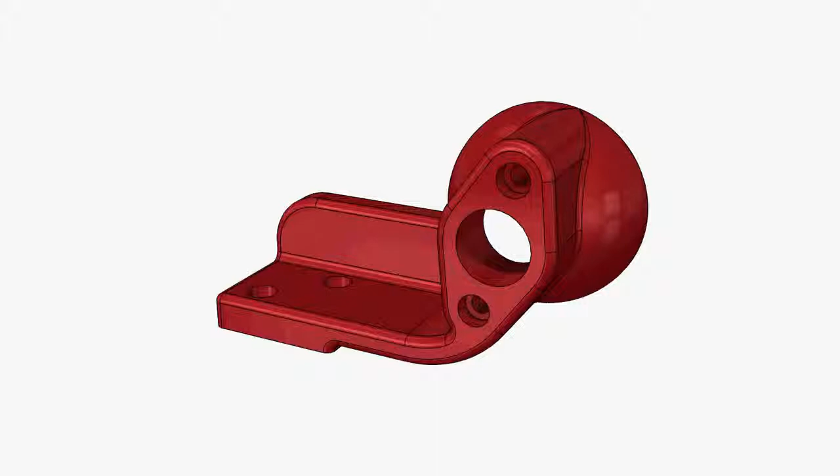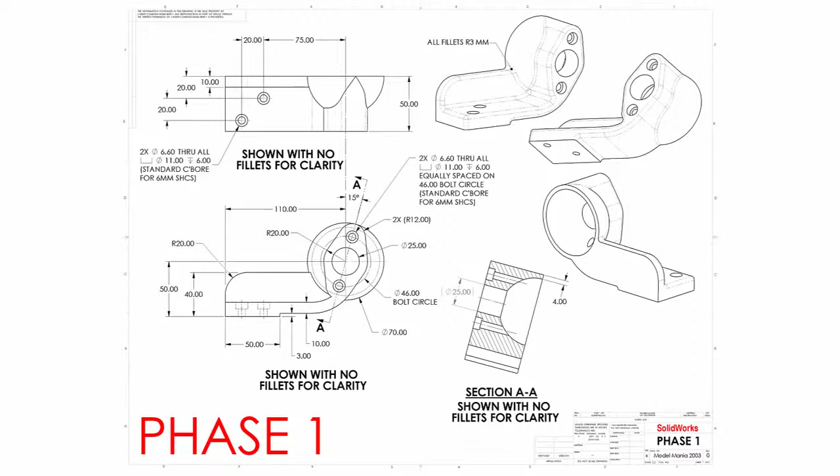In this video, we're going to take a look at creating this part from the Model Mania Design Challenge at SOLIDWORKS World 2003. If you're unfamiliar with Model Mania, it's a design challenge held every year at SOLIDWORKS World where you're given a drawing similar to this and tasked with creating the part in SOLIDWORKS both as quickly and as accurately as possible. Now, if that wasn't challenging enough, when you're done, you're given a second drawing that entails many design changes, which again you need to quickly create and make as quickly and accurately as possible.

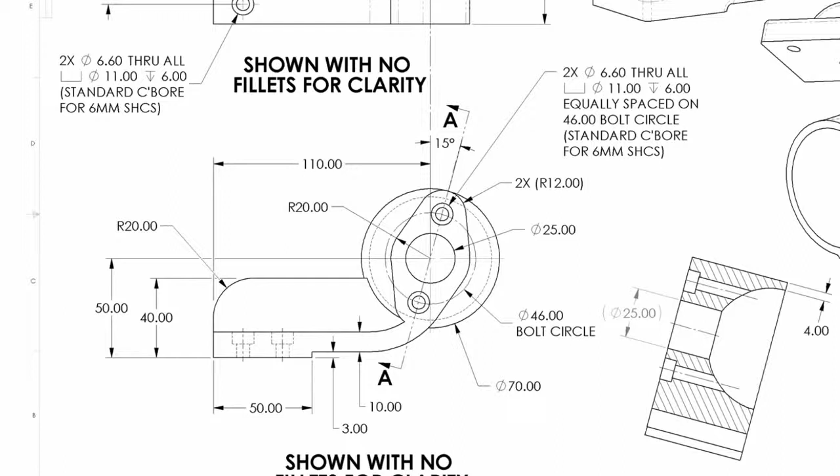The real catch is you never know what those changes are going to be. So let's go ahead and take a look at this drawing and some of the features that are going to go into this part. The first thing you'll notice is there's this combination of a dome and a flange that are both detailed out extensively in this front view. They can also be seen very clearly in the isometric view in the upper right hand corner.

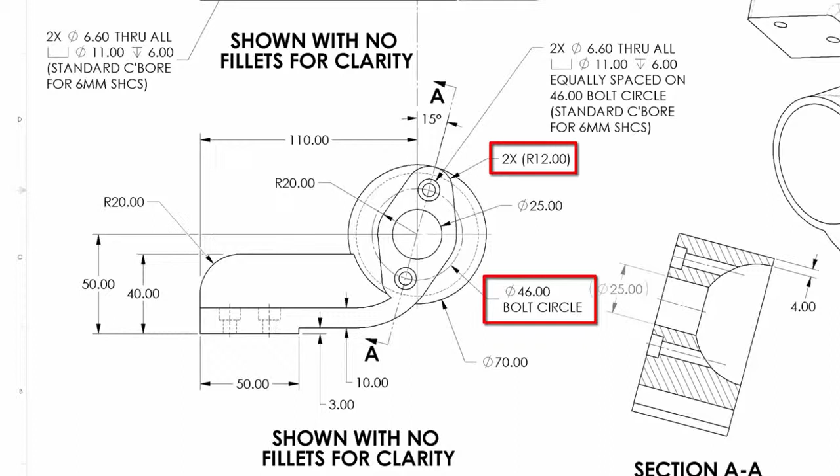Of note are a few key dimensions. Notice that the center of the circles in the arcs of the flange feature are defined by a 46mm bolt circle dimension. You'll notice that the radius here is defined in parentheses, meaning that it's a reference dimension. Specifically, that arc needs to remain tangent to the 70mm diameter circle. So that gives us some direction for the order in which we'll create these features.

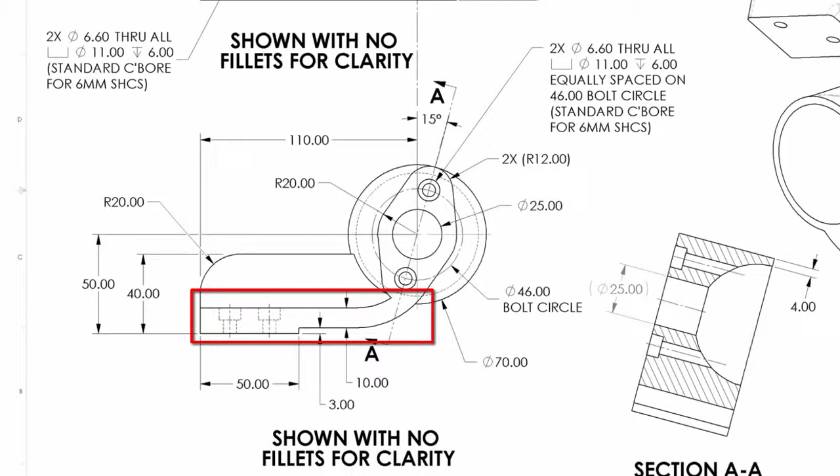The next main feature is this ledge that comes off from the bottom of this part. We'll want to make sure that we tackle this appropriately, and there's a few unique ways you can look at approaching this. We'll take a look at a few different methods. And then finally, the wall on the back side with a fillet, and then several holes and counterbores that go into the part. So let's go into SOLIDWORKS and get started by creating a new part.

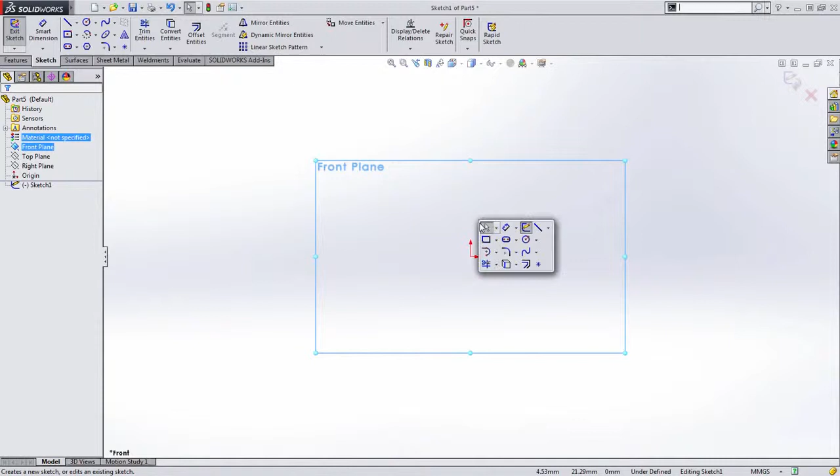Now, I mentioned that the bolt circle of that flange is defined somewhat by the dome feature itself, so that seems like a good place to start. I'm going to draw this on the front plane because I want to draw this from the orientation that we're looking at it. And I'm going to start just by drawing a circle and specifying the 70mm circle here.

Now, what I want to do is revolve this. So I'm going to go ahead and draw a line down from the middle. And to make things easier, I'm just going to trim half of that circle away. And the reason I'm going to do that is because when you do a revolve of a circle, you only ever want half of a profile.

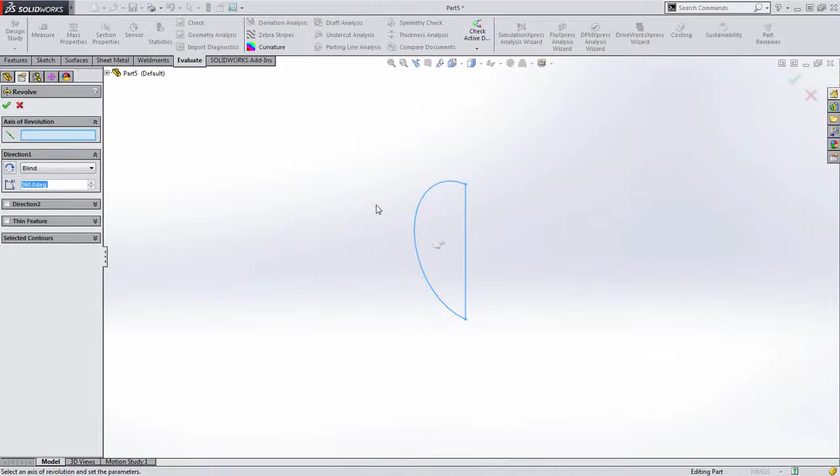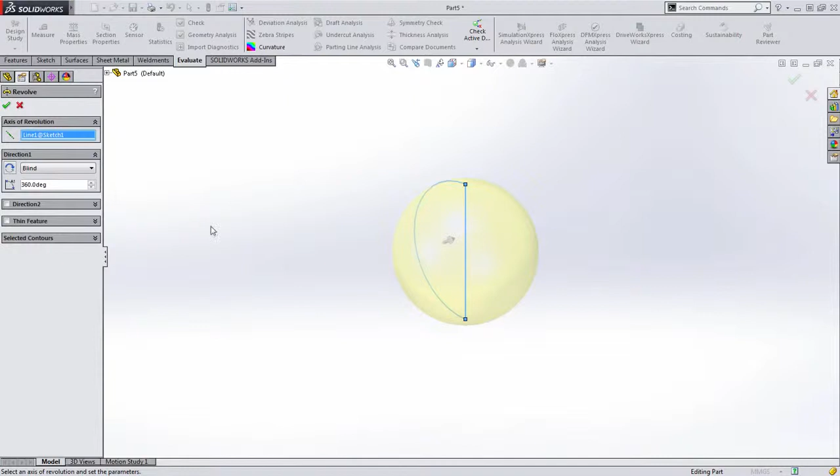Now you'll notice up in the property manager that no axis of revolution was specified, and this is because we didn't have a construction line inside of our sketch. That's okay. We're going to go ahead and select this vertical line that we just created. Now notice that it's creating a full 360-degree sphere. We don't need that, we only need 180 degrees, so let's type that in. And in this case, it's revolving away from us, and we want it to revolve towards us. So we'll flip the direction and then press OK.

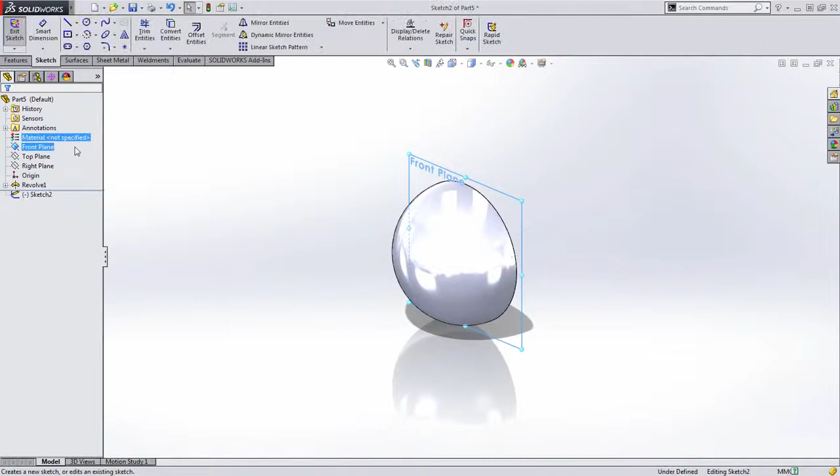So we kind of have that first feature, and this really gives us what we need to create the next feature, which is going to be this flange. Again, I'm going to draw on the front plane. I really find planes being a much better surface to draw on when possible than, say, for instance, the back face of that part. Now, this flange profile is a very common thing to create in mechanical design.

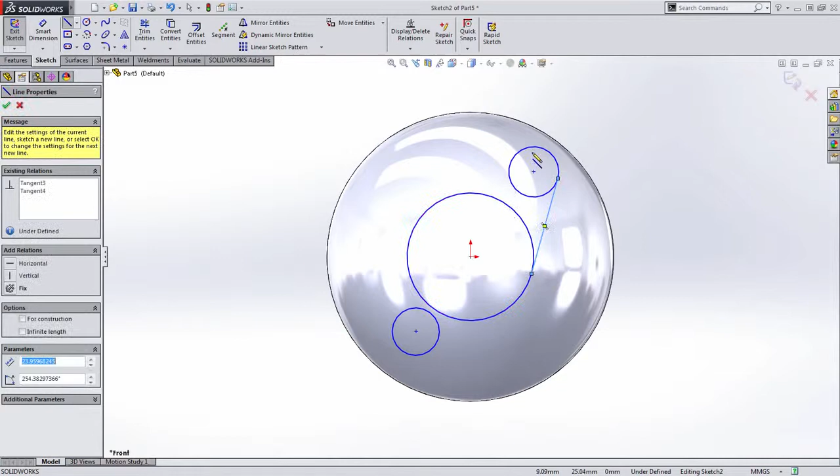It usually consists of a circle surrounded by two smaller circles and some tangent lines. Let's look at how we do this in SOLIDWORKS. The first thing I did, you notice really quickly, I went ahead and created the circles. Now what I'm going to do is draw some lines, and you'll notice that if you click and drag a line off of a circle, SOLIDWORKS maintains the tangent relationship. SOLIDWORKS also, when hovering over an arc, will try to snap to the tangency if possible. So we're going to replicate that 4 times in this case. I'm going to draw these 4 lines, snapping them to those tangent locations.

There, I missed it, so I'm just going to delete that and redraw it this time. Looks like I'm struggling pulling that straight out of there. There we go, we got it the right way this time, and we've got what we're looking for.

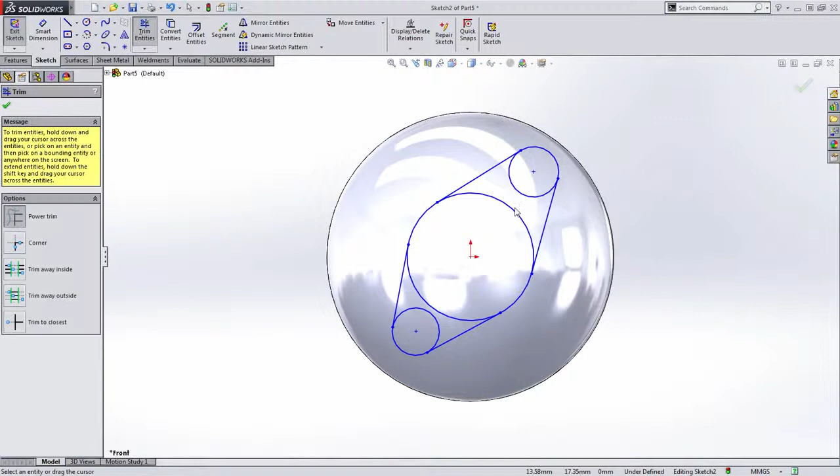Now there's a few things we can do at this point. The first one is we can trim this out. Now we don't have to. We could leave those circles and use contour selection later on. But I want to show a few things we can do here.

One of the next things to keep in mind is that these two arcs need to be the same radius. By holding the Control key and selecting those, I can choose Equal from the pop-up menu. Likewise, I know that this arc needs to be tangent to the outside arc of this sphere, so I'm going to select those two entities and choose Tangency. Now you'll notice what's happened down here.

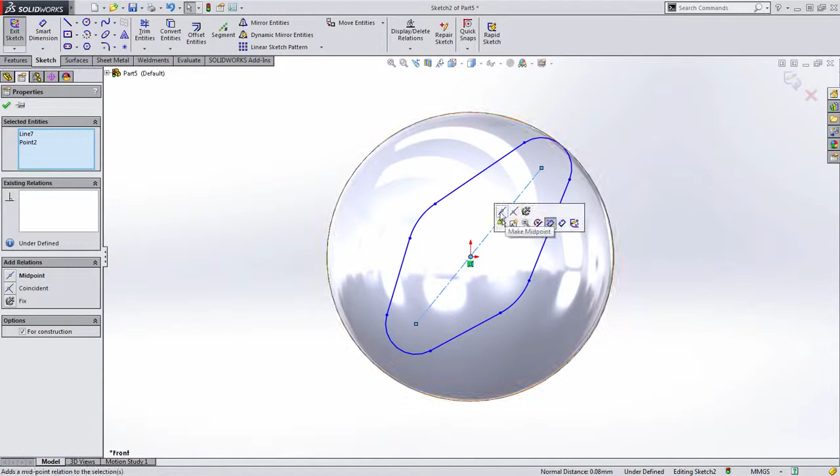Notice that this arc is still free to move. That's because they have to be the same distance off from the middle. A great way to capture this is with a center line between the two circles, then create a midpoint relationship to the center of the center circle. Now you'll notice that they always maintain the same distance.

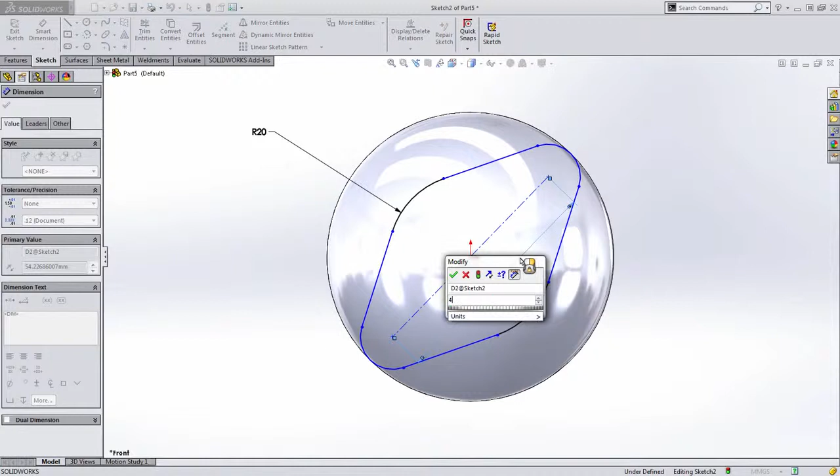And you could do this several ways. You could just dimension the length of this, for example, and in this case it's 46, and that's going to capture it. Or if you really wanted to capture this in a circle form, you could draw a circle out from the center, snap it to this point, but remember you'll probably want this to be a construction line so it's not included in the extrusion.

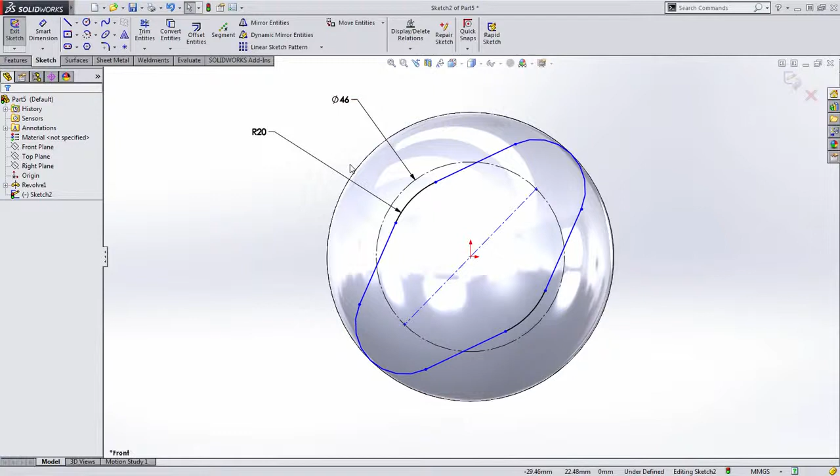Now you'll notice that when I dimension this, we're dimensioning by a diameter value as opposed to a linear value. Now the last thing we need to capture here is this angle. You'll notice that it's free to move. Now there's a couple ways you could do this.

You could draw a center line vertically straight up and then go ahead and add a 15 degree angle there. But another way you can do this without needing to create that construction geometry is to dimension to the system planes. Notice that my right plane happens to fall vertically when we look normal to this sketch. I can select the right plane and that construction line and create the same dimension we did before. That's a nice way when you want to avoid excess geometry.

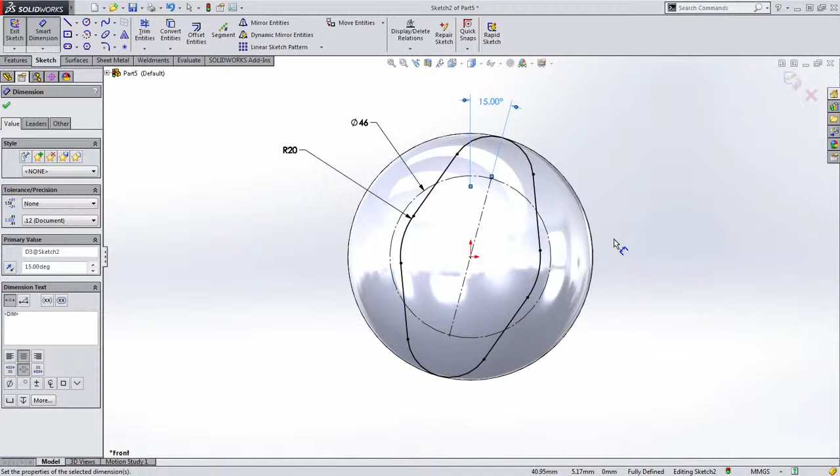All that's left in this case is to go ahead and extrude this, the thickness of the part, which is 50 millimeters in this case. Now let's go back to this drawing.

This ledge at the bottom can be created multiple different ways. It could be done with thin features, multiple profiles, etc. We're going to take a look at a few different ways you could do this. One of the first ways is using multi-body. We can start with that ledge on the outside working with known dimensions.

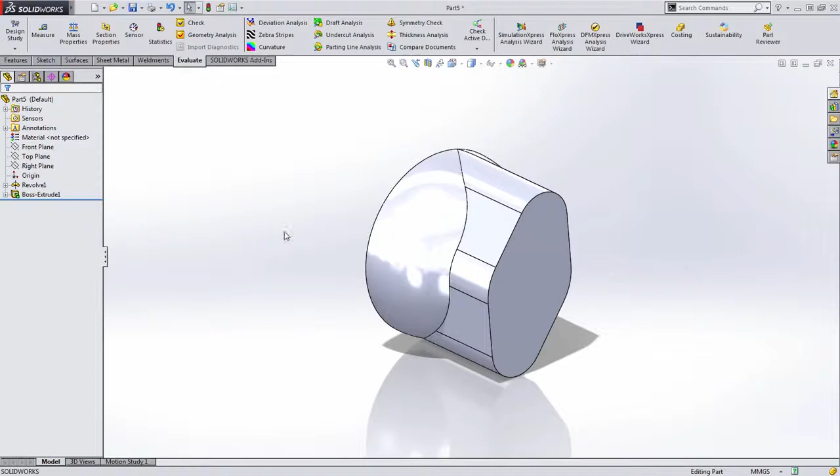I'm going to go ahead and start with a sketch on my front plane, and we're just going to draw a rectangle out here in space. We want the 3 millimeter offset off from the bottom and the 50 millimeter width. Now you'll notice I know the dimension from the center to the bottom is 50 millimeters.

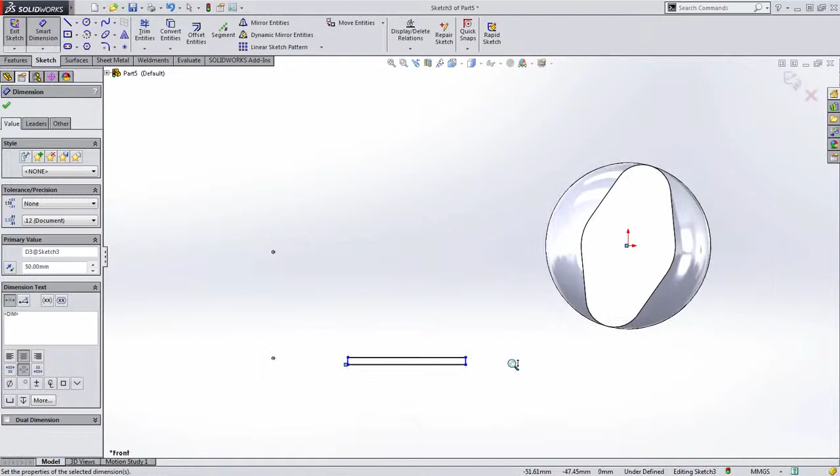Conveniently, my origin is located at the center of that circle. That wasn't by coincidence, that's because we intentionally drew everything from the center. Now again, I'm going to dimension from the center, and this time we're going to dimension to the outside here, and we're given 110 millimeters.

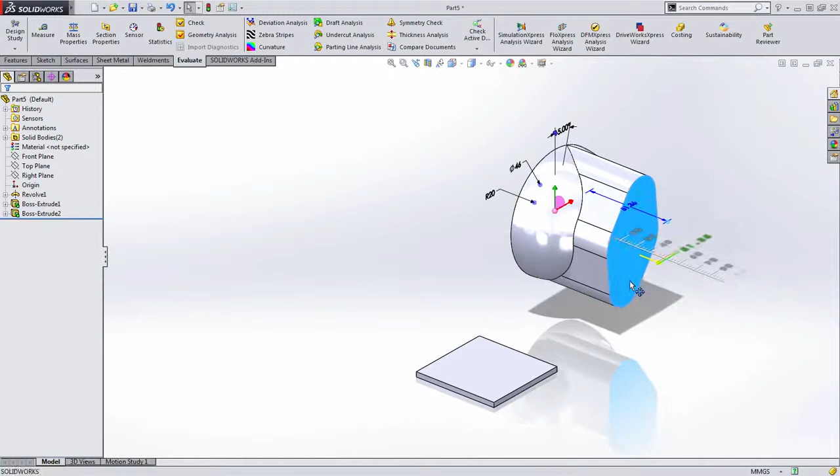Now you'll notice what I'm going to do here. I have a sketch floating out in space. We can go ahead and take this and choose to extrude, and I'm going to just go up to this face. Now the reason I use up to face is so that if this thickness ever changes, notice that that platform always maintains that same distance. Let's go ahead and type in 50 to restore that.

Now how do we tie these together? This is where the thin feature really comes in. What we're going to do is draw a line straight out horizontal, and I want to convert it to a tangent arc. An easy way to do this in SOLIDWORKS is to move your cursor back to the line and come straight out.

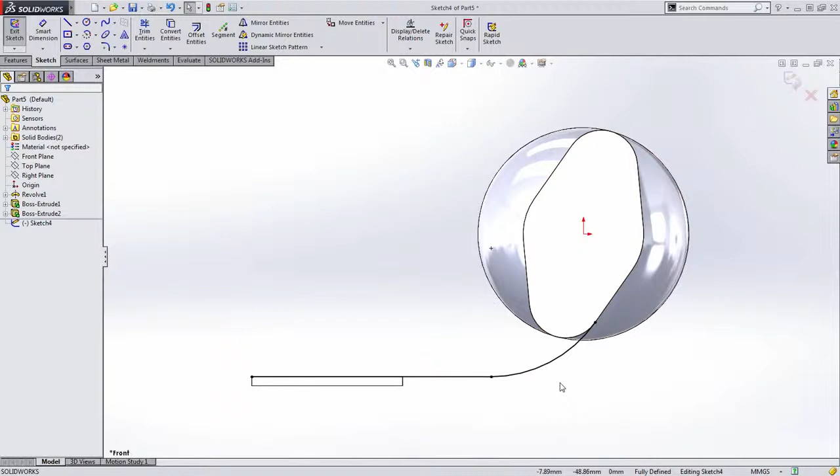In this case, I'm looking for that vertex there. I'm going to drop this here for right now and go straight back to it. I'm going to manually select these two and choose coincident, then grab that edge and that arc and make those tangent. That might have been a little confusing to see on the drawing, and I apologize for that.

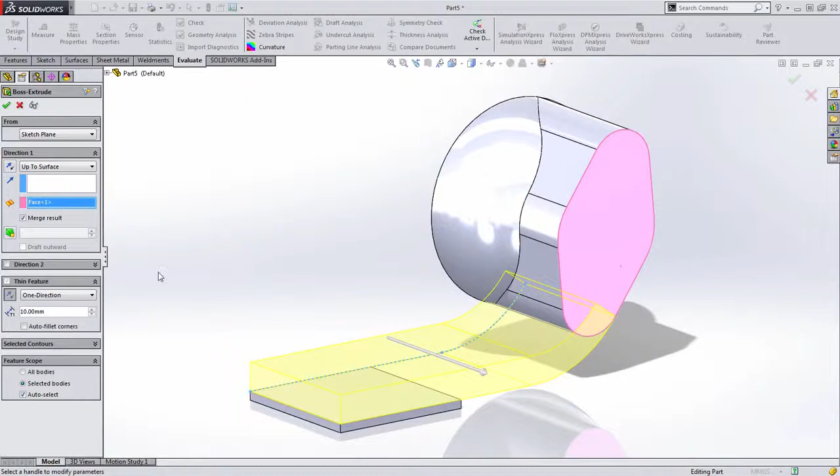So we've got that done. Let's go ahead and now use this. Like before, we're going to do an up to surface so we always maintain that relationship. Notice here, SOLIDWORKS has automatically recognized we want this to be a thin feature. All we have to do is specify that width of 10 millimeters, set it in the right direction, and press OK. So there we've done that with a combination of a multi-body and a thin feature.

Another way we could have done that—let's go ahead and delete both of these. Let's go back to this sketch right here. I'm going to keep that dimension we're working with in this case, and notice what I'm going to do: I'm going to actually draw over top of this, and you could do this a variety of ways. We could have done this all in one sketch.

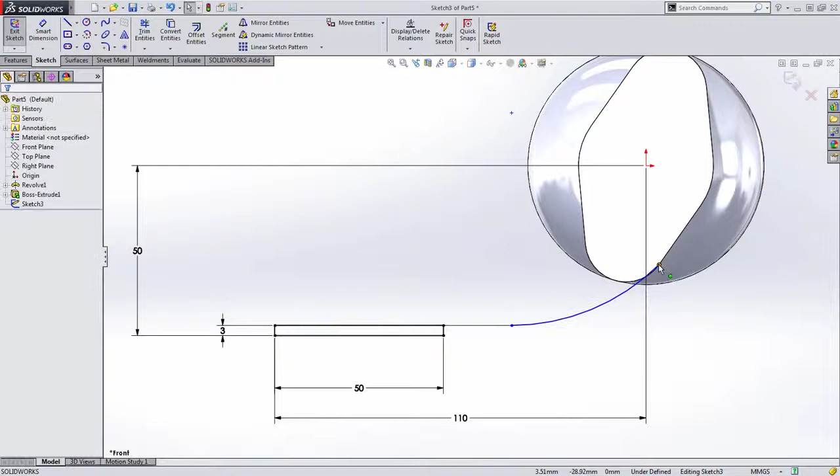I'm going to go ahead and make this tangent here and here, and then in this case we're going to offset this 10 millimeters. We'll reverse the direction, close that, and then cap the ends. Now, one of the reasons I don't like using this is there's a lot of extra geometry. Notice the thin feature was a little bit easier. Then we can go ahead and get rid of all that extra geometry in there.

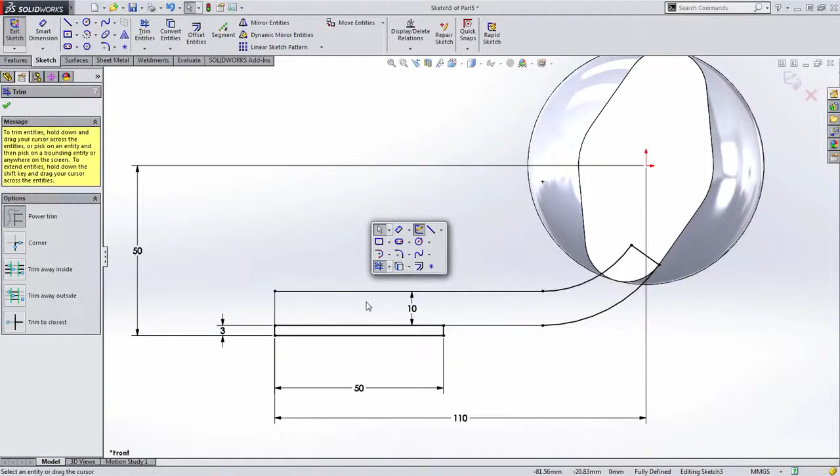And in fact, let's change the way this is done a little bit. Let's extend that. Let's do trim to closest, and we'll choose to extend. There we go. And then we could have done this all as one profile as well.

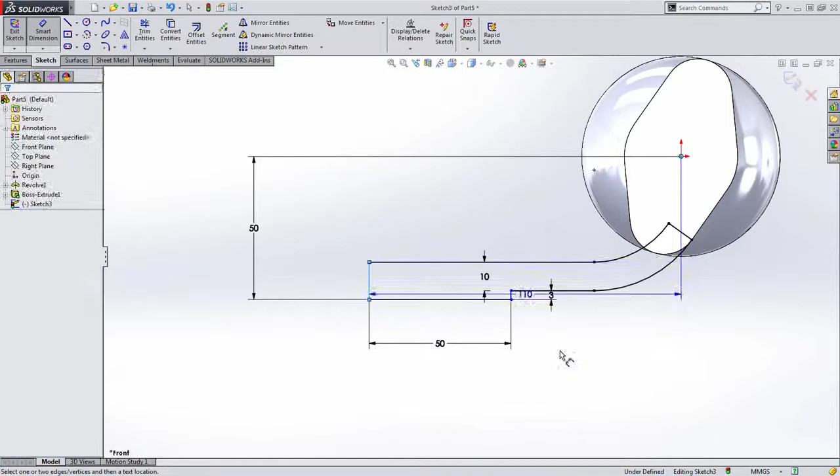So many different ways you could have tackled this same challenge. I just showed you several different ways you could have done it. We could have actually kept that feature the way it was with the extrude up to next, but I wanted to show you a variety of different ways you could have handled it. There you go. Let's go and look at creating that back wall now.

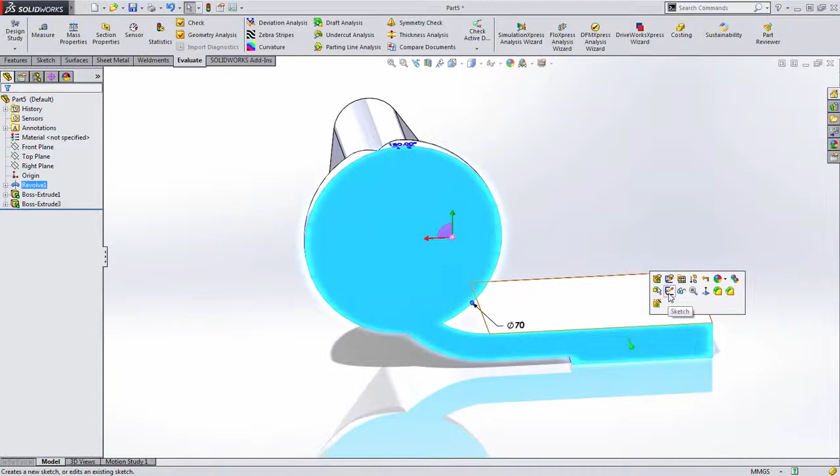Again, I'm going to draw this on this face. Actually, I'd be cheating if I didn't show you some of the advantages of drawing on a face. I'm going to reuse some of this geometry, so I'll use convert entities. Notice what that's done—it's copied that geometry onto this profile for us here.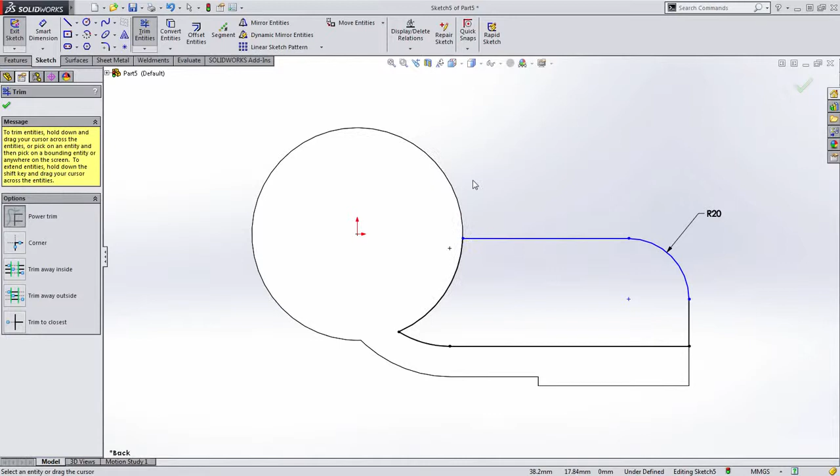And then all we have to do at this point is draw basically the rest of that rectangle. Let's go ahead and add a fillet in this case of 20 millimeters and trim the rest of this geometry away using power trim. And a height is given to us here, 40 millimeters off from the bottom.

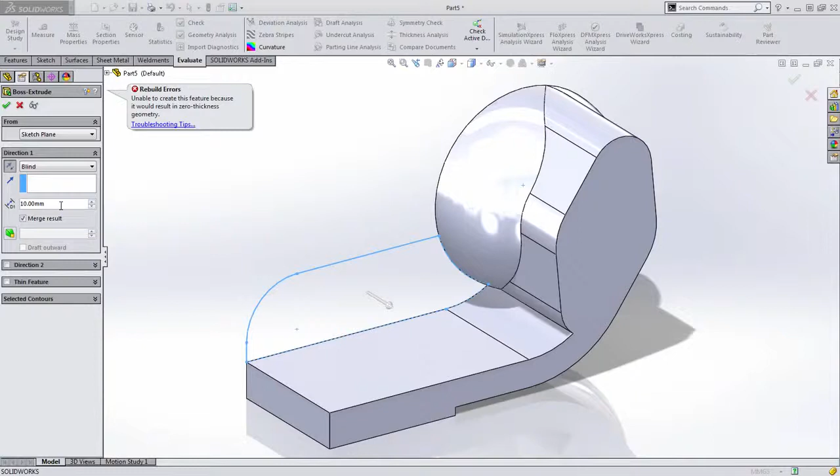So there we go. All that's left for us to do is choose to extrude this, making sure it's going in the right direction and the right thickness. Now look what's happened—we have a bit of a problem here. It actually can't create the extrusion for us, and the reason is something called zero thickness geometry. That's because when we extrude this up, we're going to create this tiny little wedge down here.

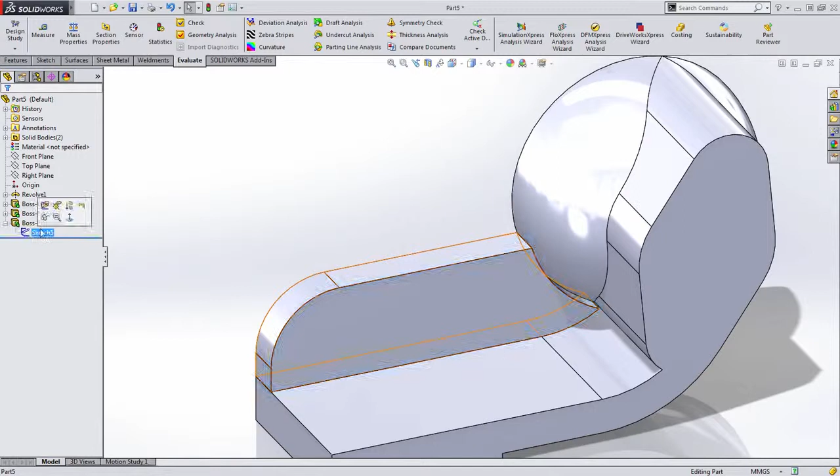If I uncheck merge results, it's easy to show what's happening. You get to a spot right here where there's actually virtually no material. So how do we solve this in this case? Well, one of the ways we can do this is by changing the way we create this sketch.

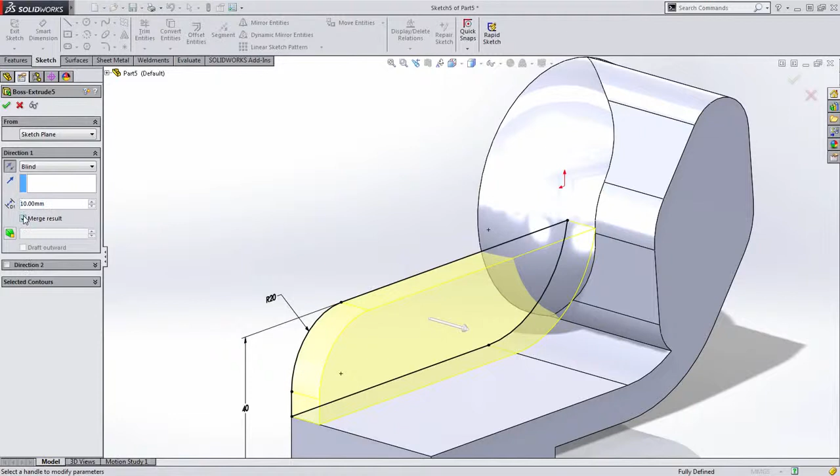I'm going to continue this geometry up, and create a corner fillet between those two entities. Now when I close this, you can see it brings them together. One thing we want to do is change that from not merging to merging, and that'll join all that material together in that location. So a couple things to watch out for there.

So we've got that done. What do we need to do next? It looks like we need to add some holes and some counterbores. Let's go ahead and do that now.

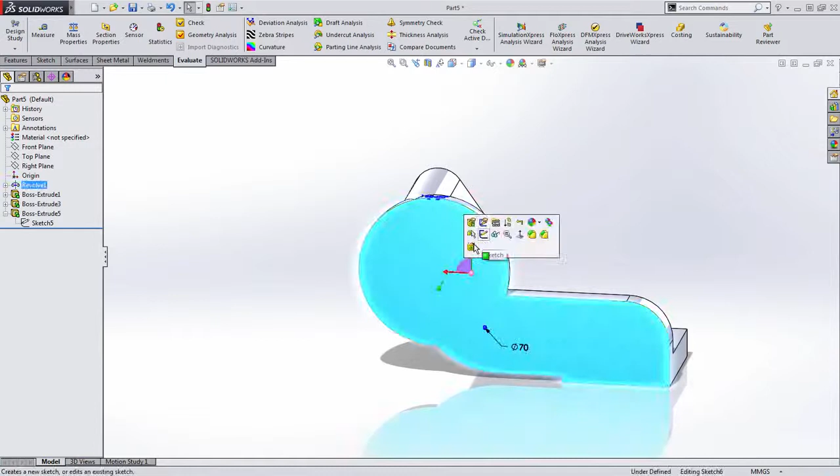We also need to hollow this out on the back side, so let's draw a sketch here. We'll do this similar to how we did it before. We could use an offset, but I'm going to dimension the circle off from that outside edge instead, because an offset wouldn't give us a full circle and we might not get exactly what we're looking for. We'll create this identically to before by trimming that outside.

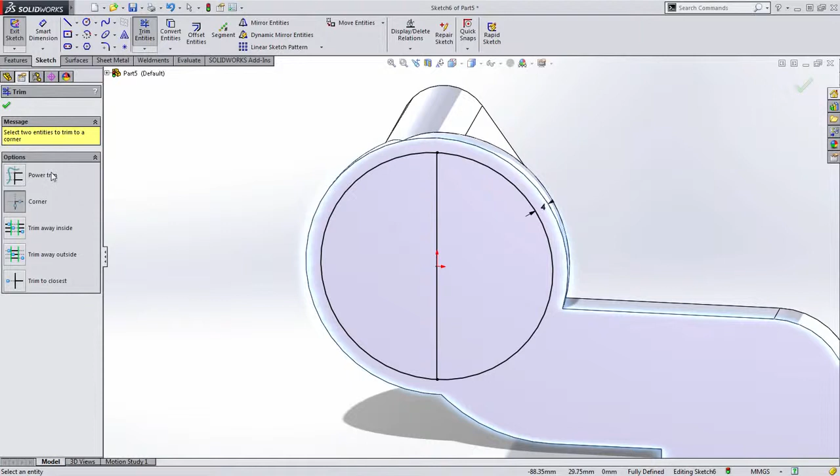This time we're going to choose cut instead of extrude, and again choose that center line as the axis of revolution. Notice this time we don't need to limit the angle to 180 degrees, because a full 360 cut is going to give us exactly what we're looking for.

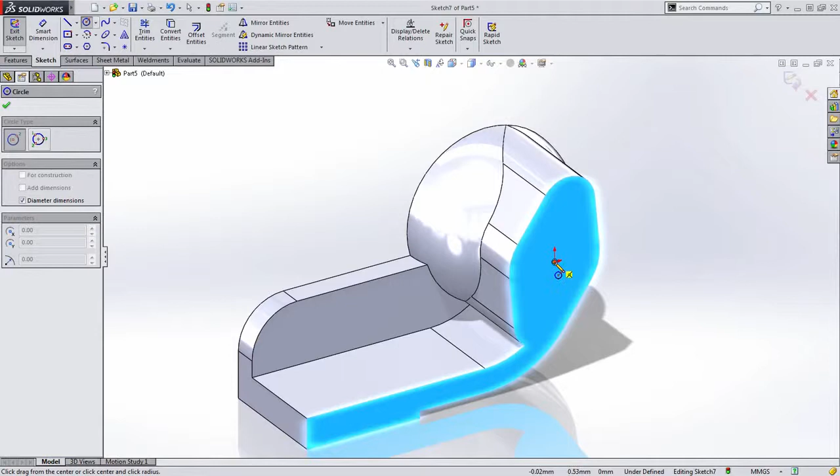There's also a cut that comes off from this top face right here, and that's a 25 millimeter diameter. Let's enter that value in - I typed in the wrong value. Let's go ahead and choose cut, and from the right click menu I'll choose through all, then right click to confirm.

The last thing we have is a series of counterbores and some fillets we'll have to get to. I'm going to create these counterbores right now, and then go back and show you how order of operations can affect this.

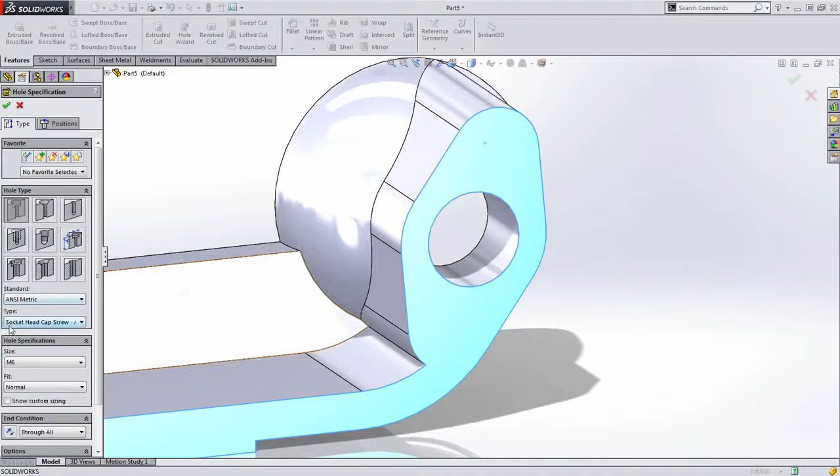Let's go on this face. I'm going to create a counterbore, and you'll notice it gives you all the dimensions, but at the bottom it says standard counterbore for a 6 millimeter socket head cap screw. So we've got all that information already specified. Notice the end condition is through all.

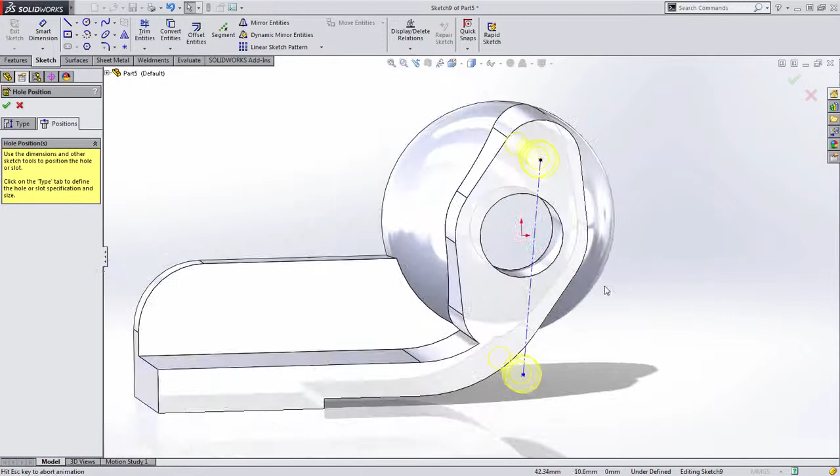For positions, we're going to snap this to the middle, and you'll notice I have a little bit of trouble grabbing that edge. Here's an example of where you could use the construction line trick we showed earlier to tie two things together. Now I can snap this to the origin, and when I make those midpoints, that's always going to fall the same distance away. Let's go ahead and confirm that.

Then we have two counterbores on this top face right here, so let's add those as well. They're the same size, so we're just going to create these and put their positions in place.

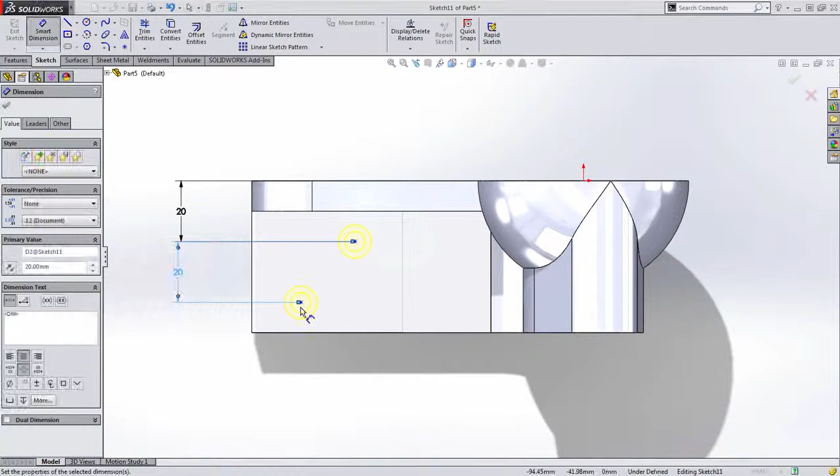Now I'm going to dimension this 20 millimeters off from the back edge here - they're 20 millimeters apart both vertically and horizontally, so we'll dimension from point to point. And finally there's a distance off from the center of 75. Again, I'm going to use the origin to dimension to, since it's easy to pick and it never moves or changes. So let's go ahead and press OK.

We pretty much have everything we have in the orthogonal views, but notice in the isometrics there's lots of fillets that go on this part. So let's go about creating those now.

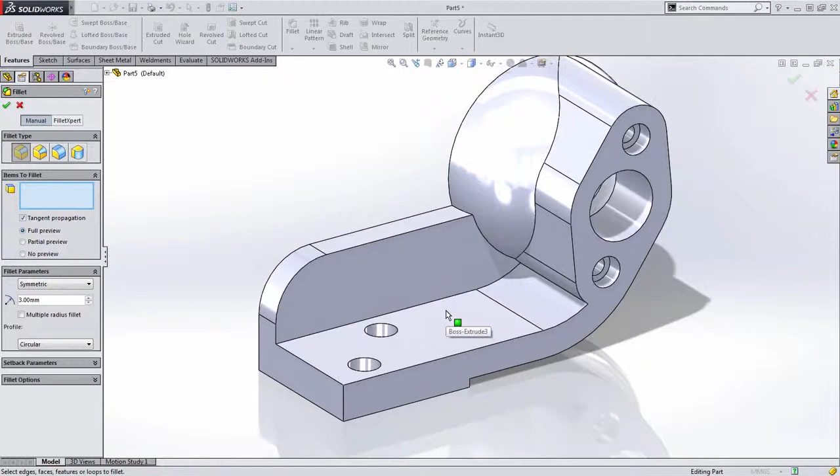These are 3mm fillets, so we'll enter our radius. If you've watched the previous videos, you probably realize I really like grabbing faces, and one reason is faces capture a lot more geometry in one pick than grabbing individual edges. The problem with grabbing faces is sometimes you can't create them.

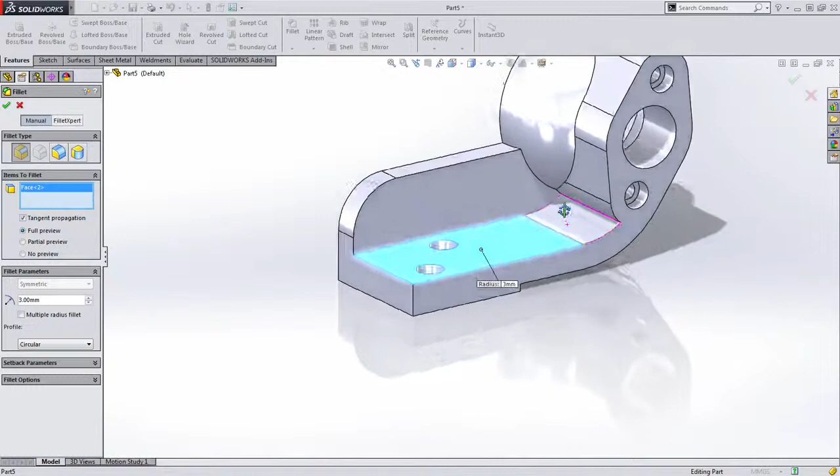The reason is it's trying to create a fillet on this edge right here. If you remember a moment ago, I said one of the things we could do is change the order of operations.

Notice the difference if I, before this fillet, now try to create that 3mm fillet. SOLIDWORKS has no problems creating that.

Though in this case, you'll still need to grab that corner. We do want to grab these edges right here, and we'll want to grab these right here.

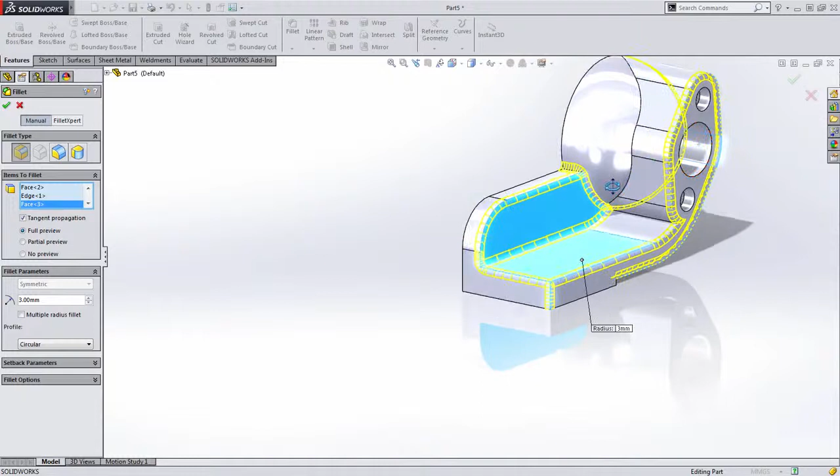Now you're probably wondering why this face specifically. Well, if I grab this face, it's going to try to put a fillet on that outside edge, which it doesn't like because of the way this fillet blends in right there. We also have a fillet on this inside edge right here.

I'm going to go ahead and grab that face right there. And it looks like we have them all except for that one right there.

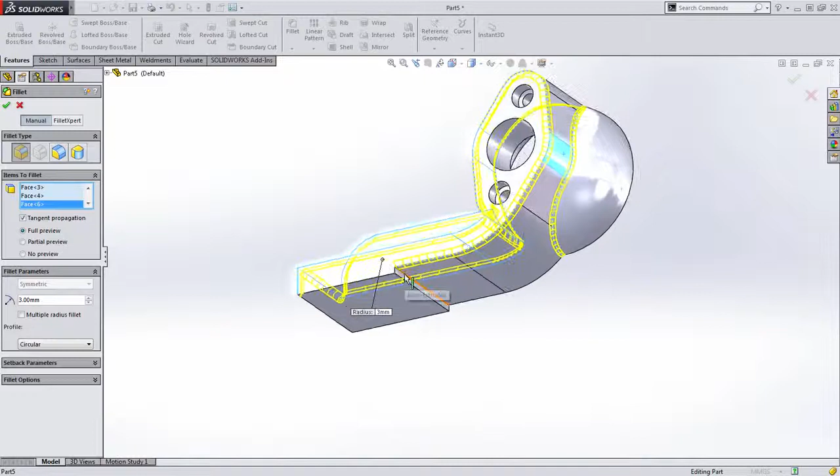Now, what if we wanted to keep that order the same? For example, I create my counter bore and I want the fillet to come at the end. Notice it's going to give me a warning here. All we need to do is choose not to create the fillet on that face.

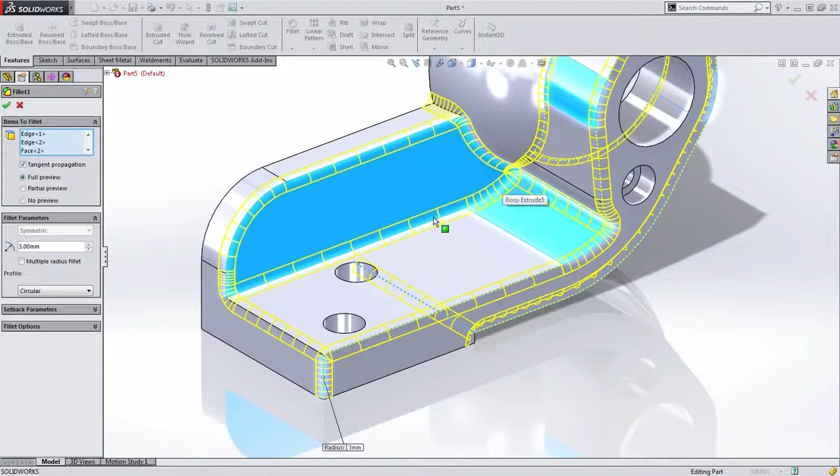And notice because I chose this face, the tangent propagation option allows the fillets to continue the way we had them before. So just a few tricks there when working with fillets. Keep in mind the order you create them can have an impact on how they look.

So there we go, we've got our whole part done. Everything looks great. So what happens next? We're given phase 2 of the drawing where we need to make some changes.

If we look at these changes, there's some very significant ones here. The first thing you'll notice is that this rib along the back has been repositioned from the back face to the front face. That's a huge change on this part.

Additionally, the location of these holes has been affected. We've changed the distance from the center, but also that back edge isn't there anymore, and we've changed the dimension to 10mm. Going to the front view, you can see that there's now this big tangency between that back face and that boss as well.

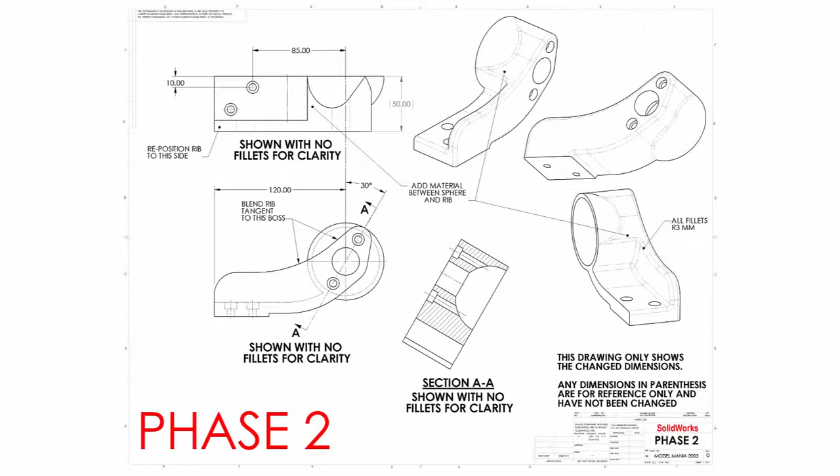And then finally, there's this extra material that's been added. So we've got all sorts of changes. This is a really tricky part. So let's dive in and take a look at how we'll approach this.

One of the things I like to do in a part like this is roll back and take a look at this feature by feature. The dome hasn't changed, none of the dimensions have been affected. But if we take a look at the next feature, we do see several changes in this case.

I'm going to go to a front view, and the angle of this has changed to 30 degrees. So let's go ahead, that's pretty simple. We type in the new angle, everything updates perfectly.

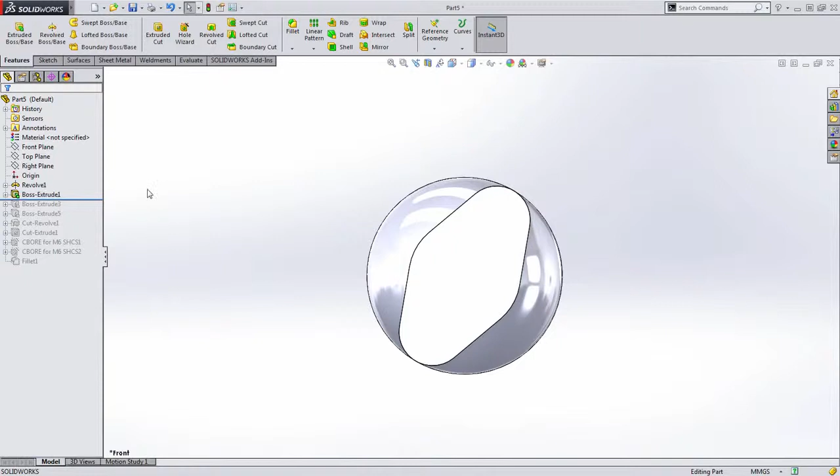Then when we move along, this ledge that we've created, well, conveniently, nothing about that ledge has changed, so we're not affected by that.

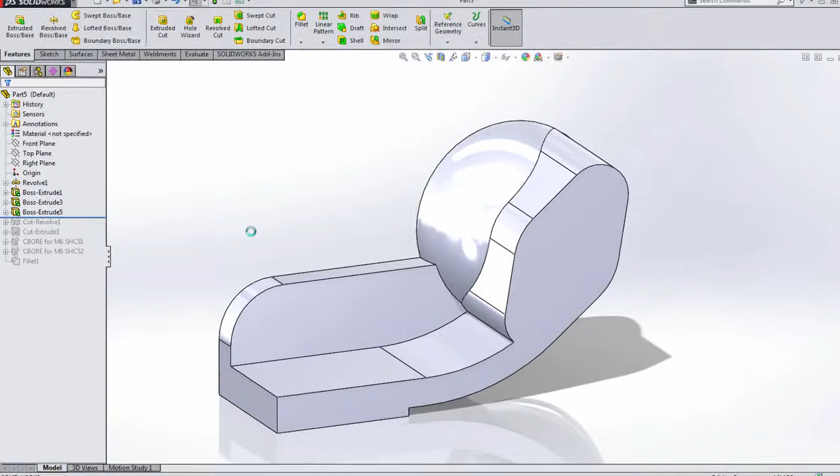Now, here's where things get interesting. This face needs to not only move from the back of the part to the front, it also has to have a rather large radius added to it. So let's take a look at how we'll tackle this.

I'm going to do this by changing the face in which this was drawn on. And to do this, we have to access the sketch, and you'll notice you have the ability to edit the sketch plane.

Now, remember when I created that, I chose that face and I said it was a bit of cheating? Well, I knew that this was going to be created on this face. Now, when I do that, it makes the change pretty simple.

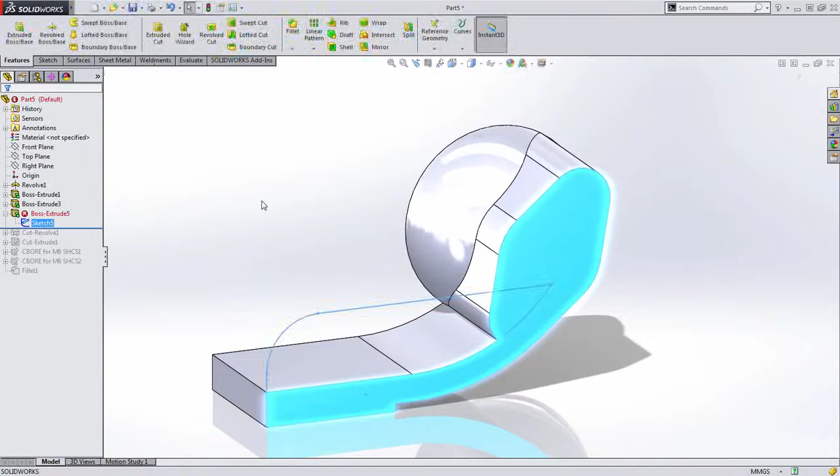It does still fail in this case, and the reason is we're going to end up with that zero thickness geometry issue right there. But if we change the direction to the inside, notice it solves no problem.

But what about that fillet that we wanted to create right there? The best way to capture this is in this same sketch right here.

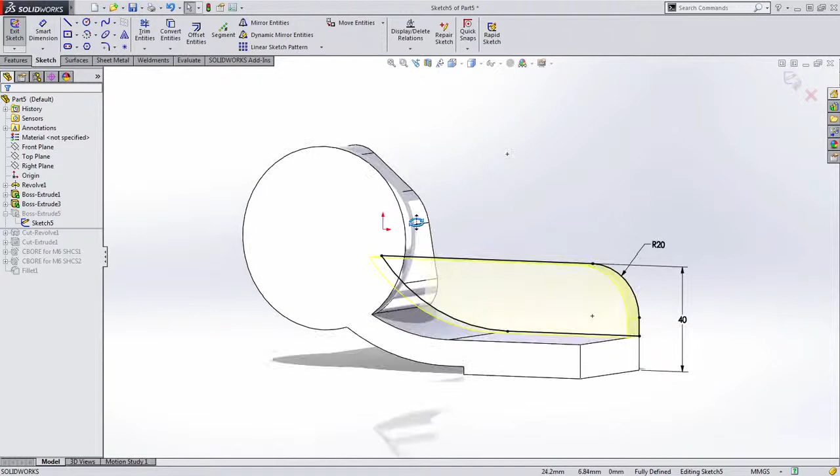And what we're going to go ahead and do, let's go over to this view. Let's go normal to and then normal to again. There we go. We want to create a tangent arc off from here down to here.

So I'm going to go about doing this by creating a 3-point arc. This is going to require what I would call a little bit of manual work, so we get the tangency.

We need some more of this geometry. You'll notice what I'm going to do—actually, I'm going to delete that. I'm going to show you another way we could have done that.

I need this arc, and this arc, and by convert entities we're going to use those. Now when I create a tangent arc, you'll notice I can come straight off of there, so it's a little less manual than what it would have been. But down here, we still need to make these two tangent to one another.

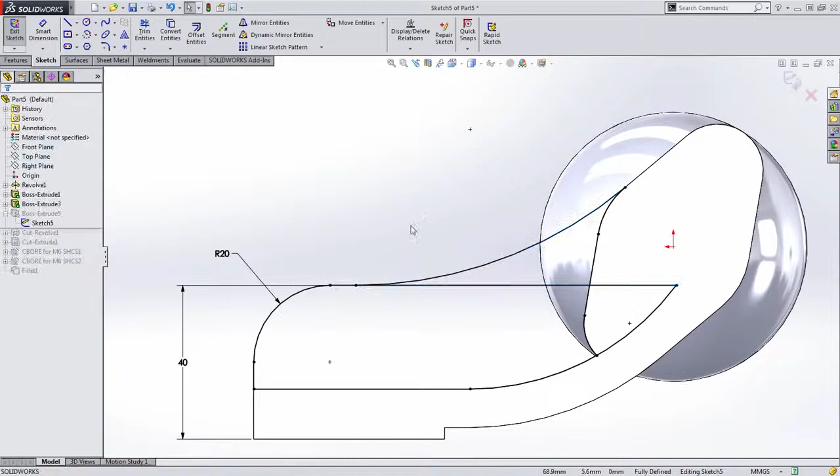Now we have a mess here that we really want to clean up. So I'm going to access the trim tool, and I'm going to start by cleaning up some of this geometry to close that profile. And just like that, you can see if I close the sketch, we've now got that feature.

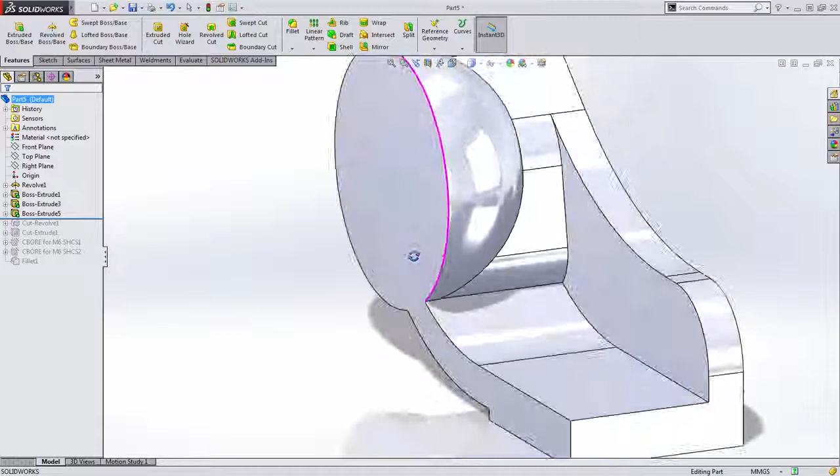Now, this doesn't mean that everything else that happens after this is going to be convenient. Let's take a look at what happens. We're going to go ahead, here's our cut. Here's our cut extrude through, no problems.

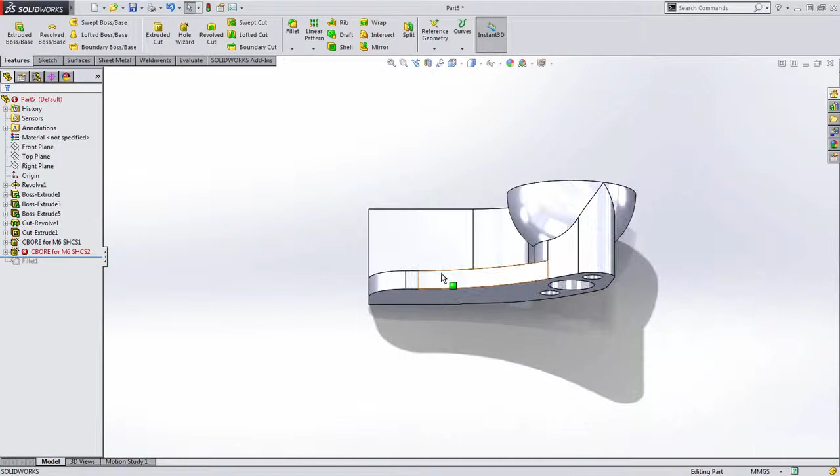Here's our counter bore. Now, if you had created that counter bore to that arc, you may have had problems with that updating. What about these counter bores here? Notice they don't even appear. That's because if you remember, we dimensioned them to that back face of that ledge there.

So let's go ahead and look at that sketch, and notice what it's doing—it's dimensioning it to that face. But these dimensions have changed. Instead, they're dimensioned off from this back edge by 10 millimeters now, and this dimension here is changed to 85.

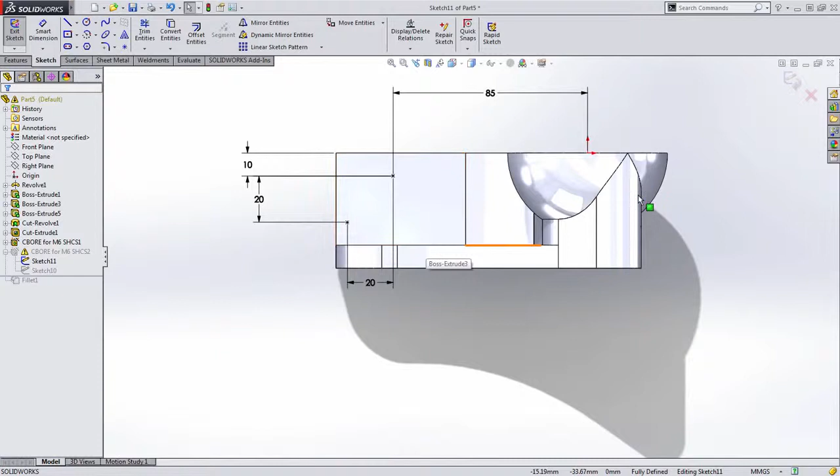I noticed that's a little close. There was actually another change that took place that I skipped over—we missed a dimension. We need to go back here. This dimension was 120, there you go. Now you can see that counter bore made it very obvious what we had missed there.

And we're going to save the fillets for last. There's a big piece that's missing here, and that's all this material that needs to get added to the inside right here. So how are we going to go about doing this?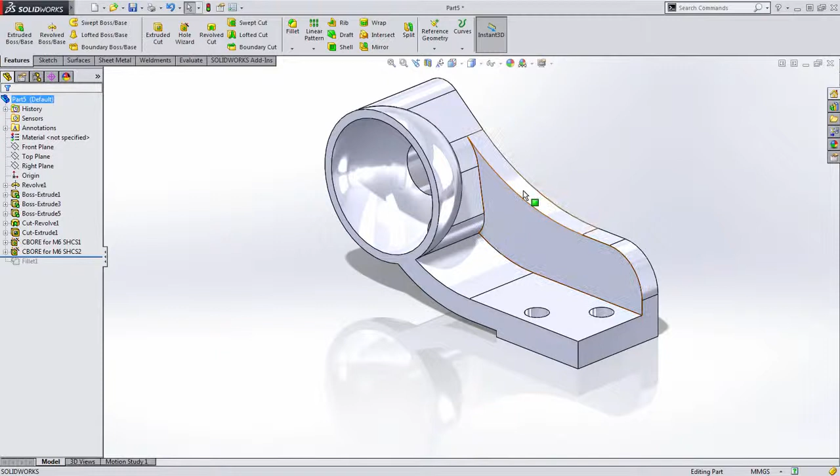This is a great place to use convert entities and up to next extrusions. What I'm going to do is start a sketch on this inside face, and choose to just copy all that geometry. Then we know if I look straight at this, it needs to be this intersection area here.

So here I'm going to use convert entities again, and grab this outside arc and choose to copy that as well. Now you could trim all this up, but keep in mind, selected contours allow you to just select a region that you want to work with.

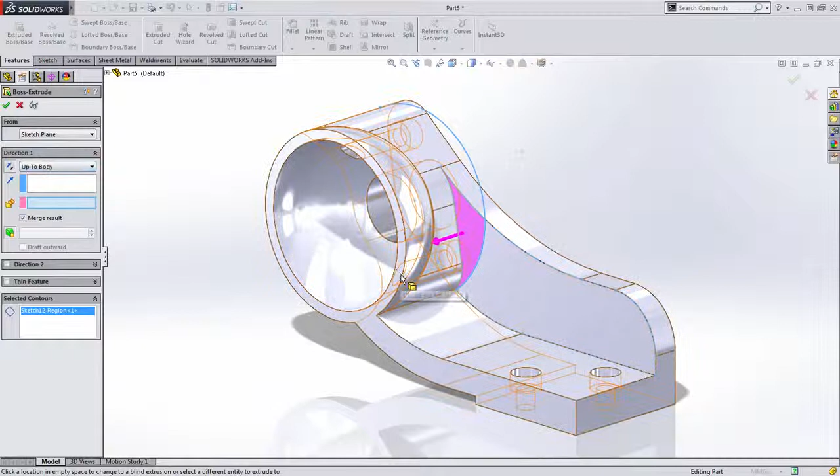Then all we need to do is choose—normally up to next would be an option here. Sometimes when it's not, you'll want to use up to body and just select the body of the part, and notice how it fills that in for us.

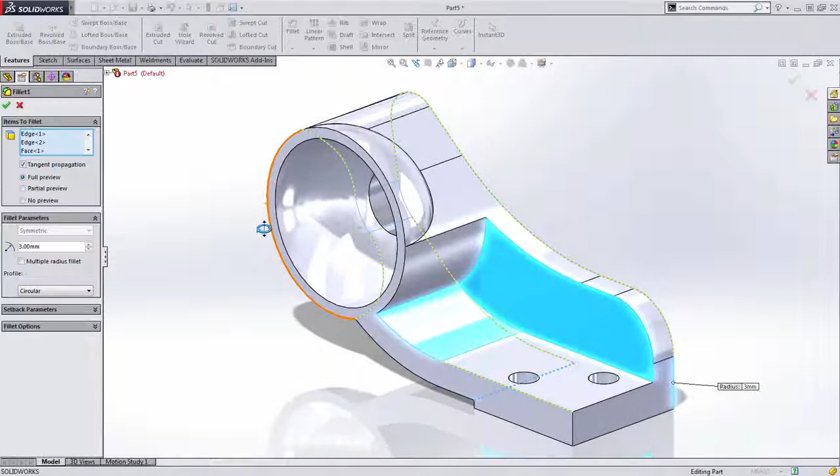Now, because of that big change right there, that one more than any, we're potentially going to have problems with our fillets right here. Some of the faces that we had selected previously no longer exist, and notice it says there's a face missing. That's okay—we'll go ahead and delete that from our selection, but it's still not solving. Why is that? Well, now we're running into a case where sometimes you need to create fillets in a slightly different order.

So notice what I've done there—I'm going to select these in a slightly different order to make sure I get what I need in this case. And there we go, it looks like it's cleaned that up. We've gotten everything we need and everything else is preserved on the outside.

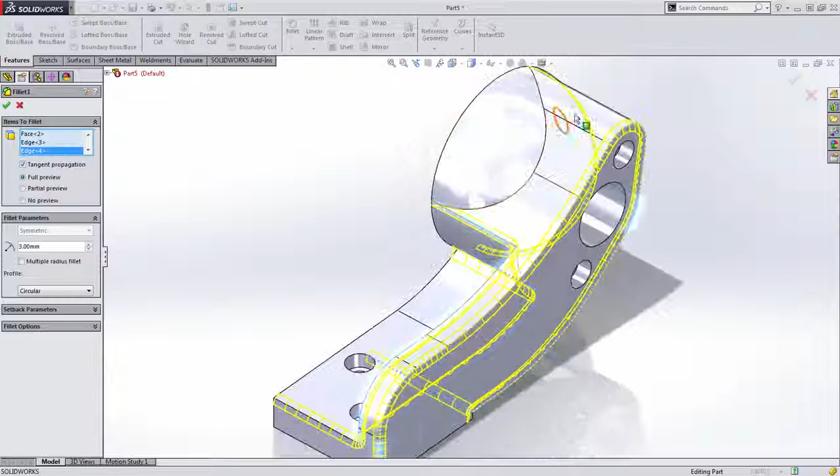All we'll have to do is at the end create this last fillet as a separate feature here. Now you could have done this in a variety of different orders—that's just one way you could have gone about that.

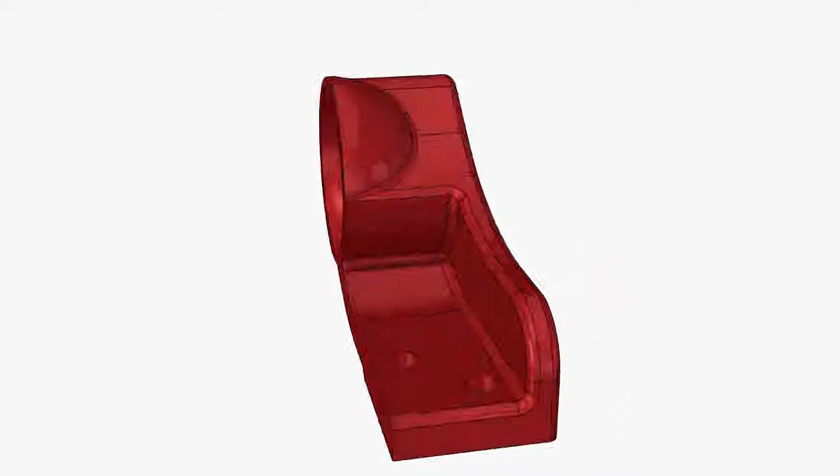So there you go, the Model Mania Design Challenge from SOLIDWORKS World 2003. This one had a lot of changes to the second phase, but hopefully you can see how SOLIDWORKS' robust capability to make changes on the fly made it not too difficult after all.